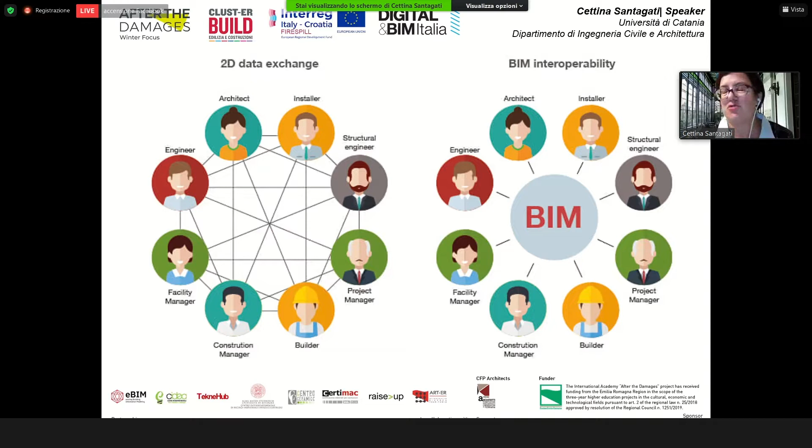This approach, this BIM approach, now let's try to look at it from a different point of view within a longer process which leads to the definition of digital twin, in which the BIM approach is one of these steps that we can call levels of maturity of the BIM. Also in this case, the concept of digital twin comes from the manufacturing industry. The digital twin word was created by Grieves in 2002.

Here I chose one of the best definitions, in my opinion, of a digital twin. So it's a dynamic virtual representation of a physical object or system across its life cycle using real-time data to enable understanding, learning, and reasoning.

There are recent studies trying to make this parallel, this connection between digital twin in the manufacturing system and the implementation in the building sector. Specifically, Simon Evans identified 6 levels of maturity. So it is from level 0 that we started developing with the first laser scanners, what we call reality capture.

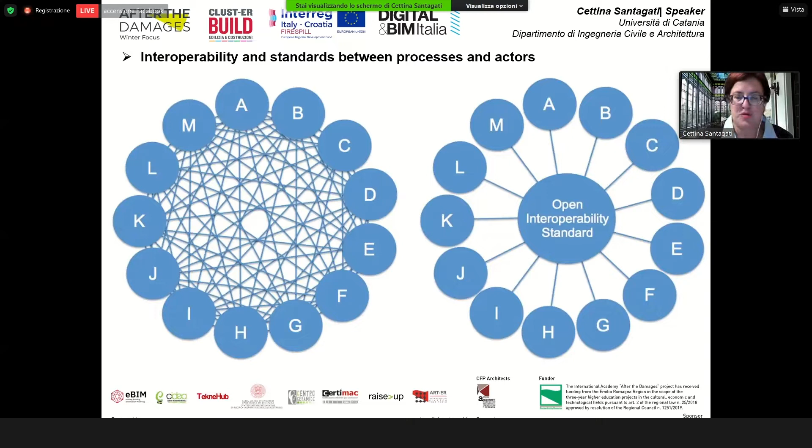For us, both in the field of project development and the context of intervention in existing systems, if I've done an acquisition through laser scanner or these techniques, and then moving to the model, and then moving to additional investigations, all these passages sometimes involve, because of technological barriers, the loss of data in the workflow, which we should limit in order to obtain products which, from the beginning to the end of the process, are controlled, are checked.

Another crucial aspect concerns semantics and ontologies. Some time ago, I could see that Federica Maietti was connected. These are a few pictures from research of the European project INCEPTION. When we acquired, and please remember level 0 reality capture, to giving intelligence to our models, a point cloud contains no information about semantics, so it's a number of different points in which we give a meaning, both during modeling and during reporting.

One of the objectives, one of the challenges of several research teams is to work on semantics, therefore on recognizing within a model the different parts, the hierarchies and the relationships, to be able to achieve the so-called layers of knowledge, which overlap the various systems like the BIM, to try and add this information.

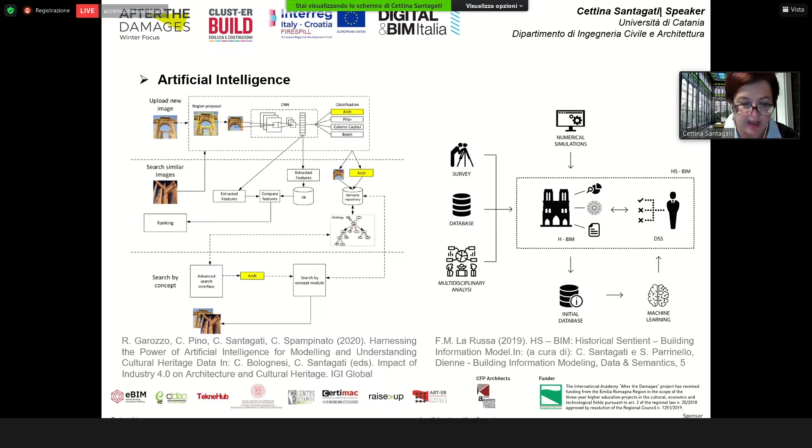So, for example, they are very useful in the case of classification or in the creation of decision-making support systems, which somehow suggest solutions, for example, for the management of buildings or rooms within buildings.

And going back to digital development, the models with no semantics, we want to try and facilitate our job, because all experts know that the passage from the point cloud to a model which is semantically functional is very time consuming, and in this passage we can lose so many things. And also, we need a long time to create new libraries of historical buildings, etc.

A research group is working on the automatic development of the passage between the point cloud and an automatic division in parts of the cloud, so that already in the cloud there are parts and pieces that can be recognized, like columns, capitals, windows, walls, doors, etc. There is a mixed team, researchers from the Politecnico of Turin, University of Ancona, and from the Bruno Kessler Foundation.

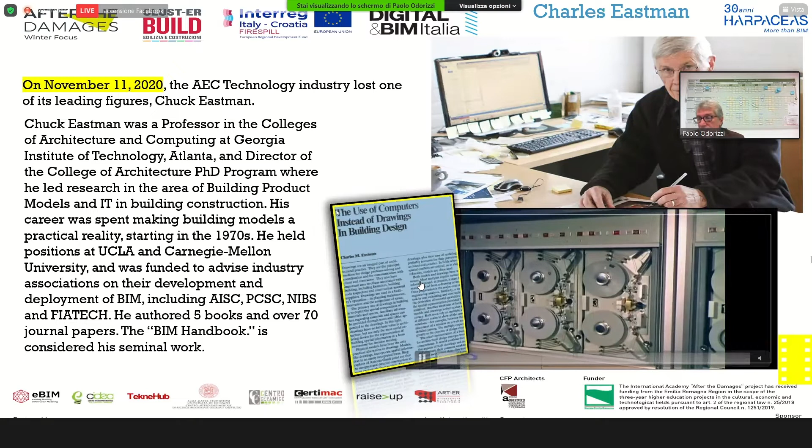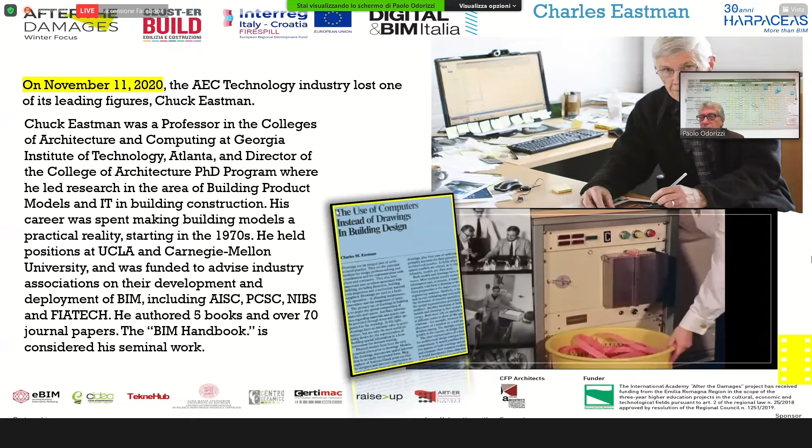These were written using old typing machines. Those were times where talking about digital transformation was not that feasible, but Professor Eastman was already explaining the transitioning into digital models. As you see in this article, the use of computers instead of drawings in building design was paving the way to today's technology. So thank you again, Professor Eastman from the Georgia Institute in Atlanta, for starting off this process that has cascaded down in Europe and all over the world.

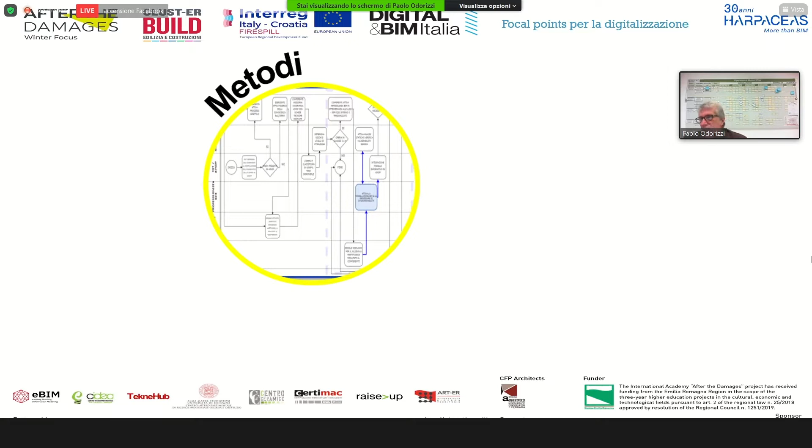In my presentation, I try to highlight the most meaningful things to me. First of all, we should consider methods, processes, and the policies to apply. So if we don't focus on procedures, we will never achieve good results out of technology.

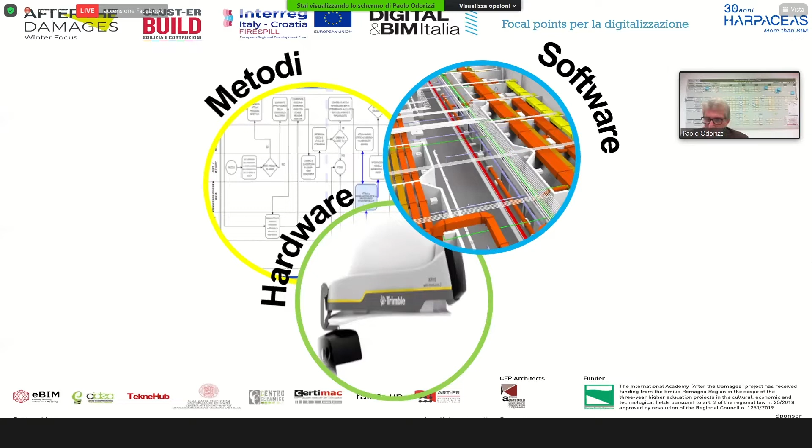In addition to this, we must use software technologies for sure, which is absolutely paramount. I would say obvious when we speak about digitization, but also we need to use software technologies that work side by side with hardware technologies. So we actually need to shift from software to the actual hands-on experience, the construction side, and we need to do this using instruments that are quite tangible.

Let's not forget the people. Yesterday we mentioned people a lot of times. We shouldn't take it for granted, but they're the main point here.

So let's talk about methods. Maybe methods was not the right term. I meant laws, decree laws, standards, guidelines, and technical reports. We'll take a whole seminar to talk about them, but let's try to have a look at this.

The Ministerial Decree 560, which provides for public administrations for developing digital awareness, or to raise their awareness to build capacity, to strengthen this capacity, and start doing things according to digital standards.

Then we have technical standards, so-called technical standards. Harpaceas is a member of the UNI in helping draft standards, for example 11337 on the use of BIM. But we also participate in technical tables of the 442 Committee of the CEN, where we develop similar standards at European level, and we also collaborate with international ISOs.

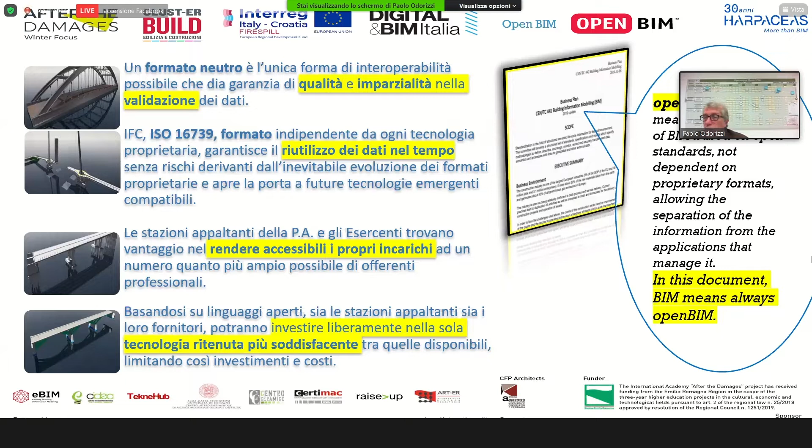Then there's the problem of investments. If the whole supply chain communicates using open formats, investments from the appointing parties and the appointed parties can be lower. There can be savings because they will be able to choose the most effective technologies for them and use those technologies rather than investing money in useless stuff.

And there's the data exchange issue, which I'm working on in a TC442 group. I would like to give you this short concept. This is the process as I see it: a series of operations conceived by a person, transformed into digital format, and then this information is transferred using so-called digital tools. I don't know if sending emails can be considered digital, but anyway, this information is reinterpreted, then checked, and then used.

So now we should shift from this process to one known as machine-to-machine. To simplify it, this means getting rid of certain steps, making it as automatic as possible. We should get rid of printing information and scanning it. We should use machines as much as possible, and by machine, I mean network.

Even in a bidirectional context, so with a query and an answer and a reply, this is not easy.

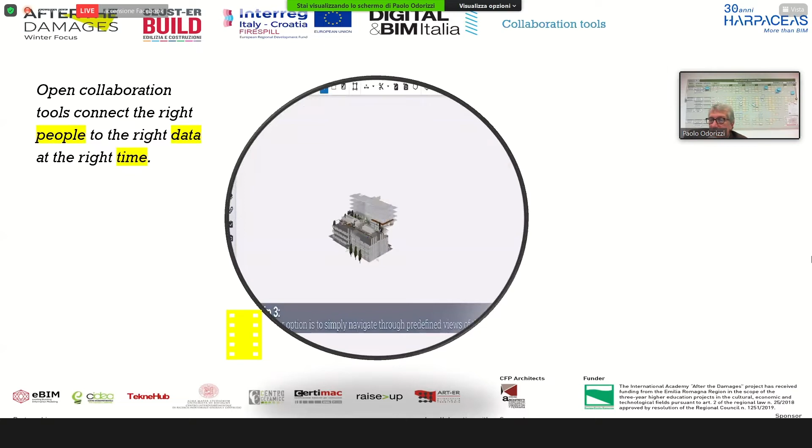Of course, there's information behind this. So we can connect people and data at the same time. So here you can see some examples of how these tools can be used.

In particular, this is an absolutely widespread tool internationally. From my point of view, I've seen a lot of extremely positive reactions by those who have tried to use these tools. I think you should try to believe it. This is the strongest suggestion I can give you.

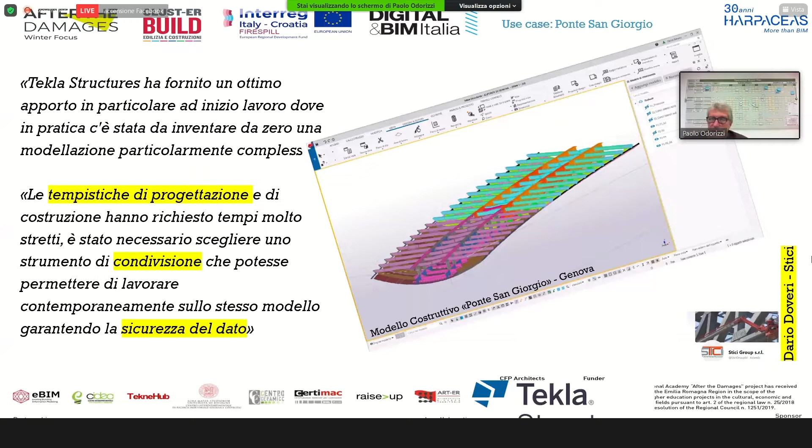This was shown by some use cases, some recent ones where we were directly involved, such as the construction model of the San Giorgio Bridge in Genova, where we were able to create an extremely detailed model of the project. This allowed us, according to some of the people who participated, to meet the design deadlines, through sharing information the way I have just described.

So we used digital technologies a lot, even the IFC format. And I would like to give you some more references, about people who were involved in this.

These people said that these tools were highly precise so that we could work on different steps in a parallel way, simultaneously. These results are real. We can't say that Italy is lagging behind anymore. This is proof that we have multiple references and examples of works made using these tools. So productivity and quality have increased thanks to these technologies.

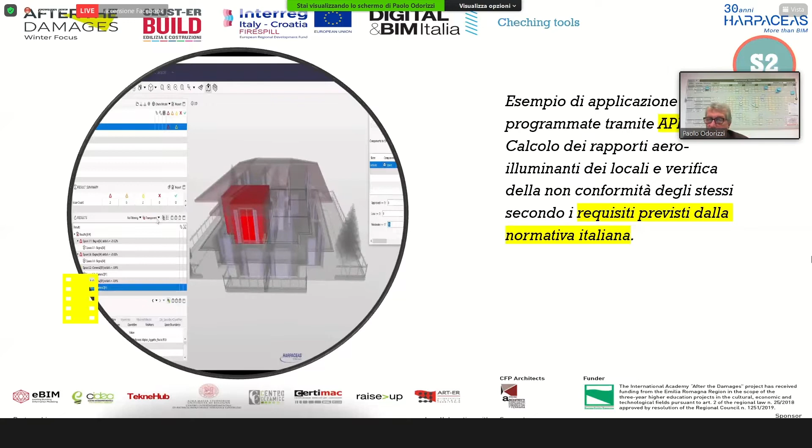Another example I would like to give you is programs and products that control design. They can be tools to check models, so model checking tools, something that is automatic, that checks the consistency, if they're correct, if they're good, if they contain the data that they should contain. Maybe they don't provide design information, we leave this to designers, but for sure, they give a huge contribution automatically to validating these models.

Now I'm using Solibri, which is a Finnish software, very well known, useful for this.

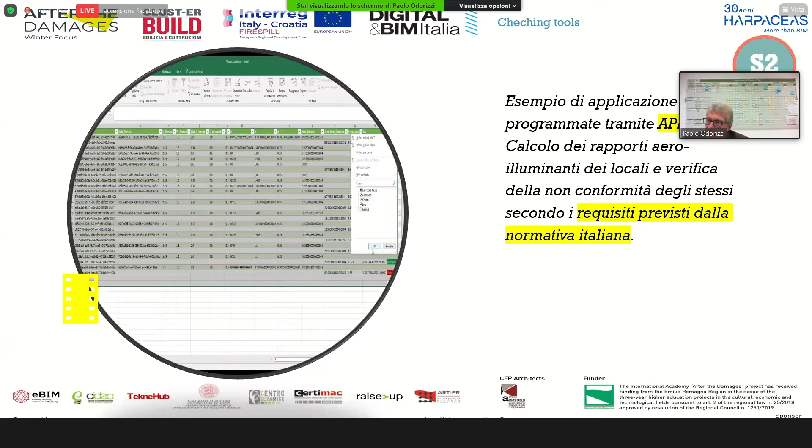The checks are not limited to models. We also check regulations and standards. We also have to think about solving the drawing problem.

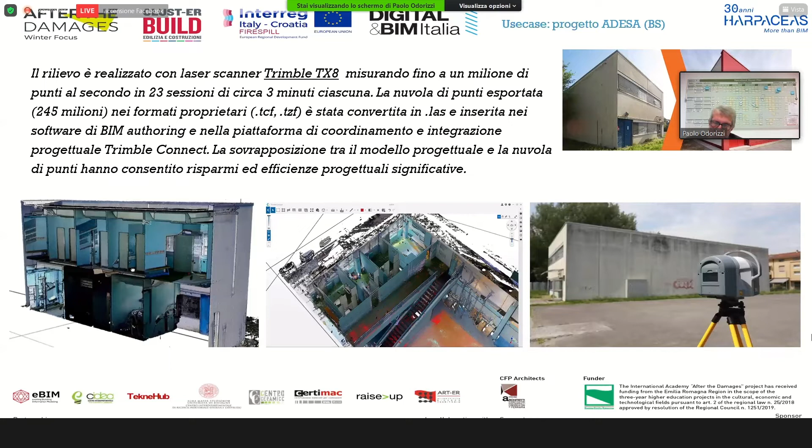We did a whole survey of quite an insignificant building. It was actually a gym. So we renovated, refurbished this building. So we used the point cloud and the integration in the whole design process.

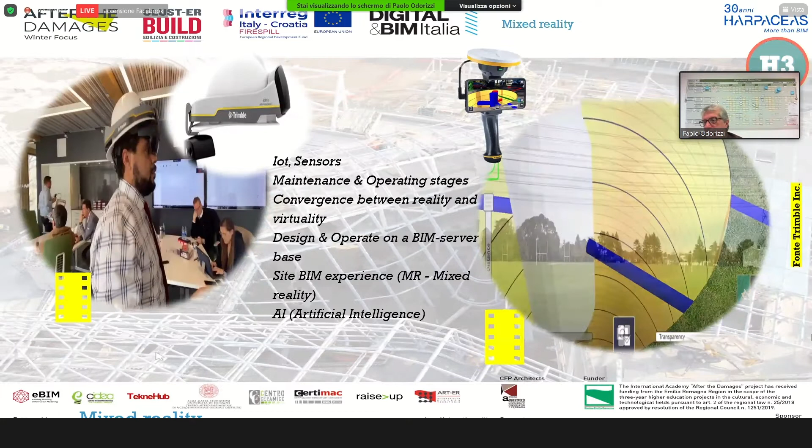We have these two wonderful machines. I'm not going to say a lot about them because maybe later in the day we will talk about them. These are new technologies. These are not that expensive. They're quite affordable. Here we can analyze the built heritage and mix the built heritage with the virtual things, virtual elements. So you can see an example of mixed reality. It can also be applied on the ground.

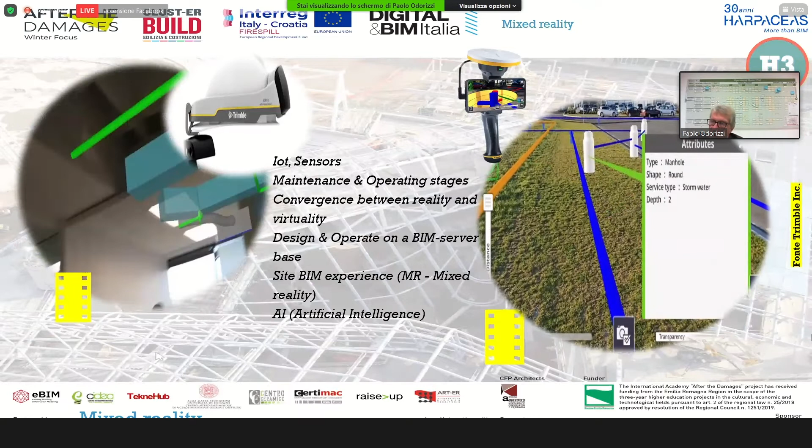So again, we're using a Trimble tool. So we can create models and see all the information available. These technologies are already available. There are some investors in Italy who have invested in this already. So for those who want to lead the trends in technology, these are extremely good perspectives.

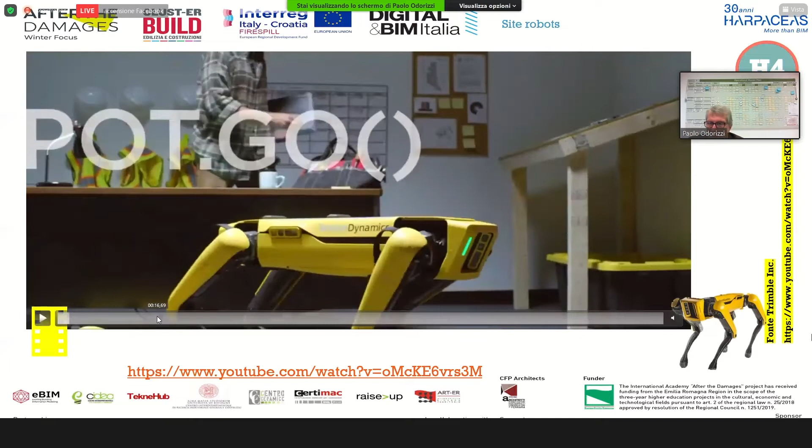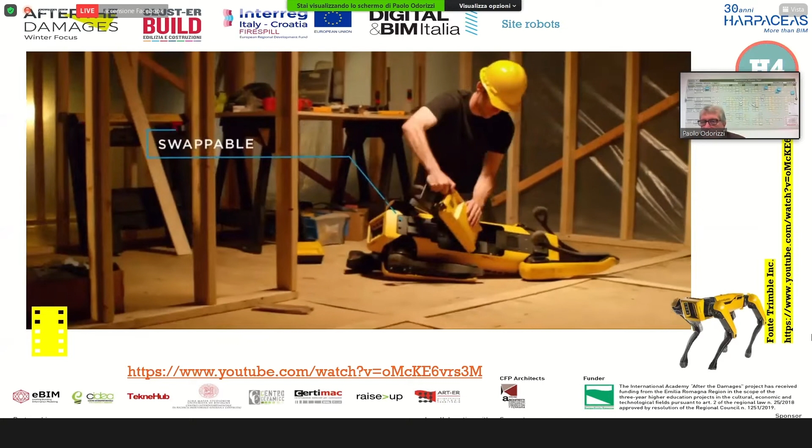I wouldn't say that we should do as this guy from Boston Dynamics, rather than a guy, I would say it's an animal. I'll leave you the website where you can look at this video. This is a promotional video. This is an ad. This tool is actually available. So that robot can transport surveying devices and work basically independently and on its own. It's quite expensive. It's powered by batteries. You should change battery after 1 hour of work. It can open doors.

So apart from this, maybe this cannot be achieved by everybody in a short time, but this gives us the idea of where we're going. It can carry 14 kilogram devices. We already talked about digital twins.

Just a couple of experiments. One we did on the entrance of the train station in Milan, which is the one on the left. So as you can see, the features of a digital twin model are quite different. They're technically different, but they allow us to give a digital identity, a digital look to the building assets that we have on our territory. For sure, we're gonna see a lot more of these, as well as digital twins used by Eni in this case.

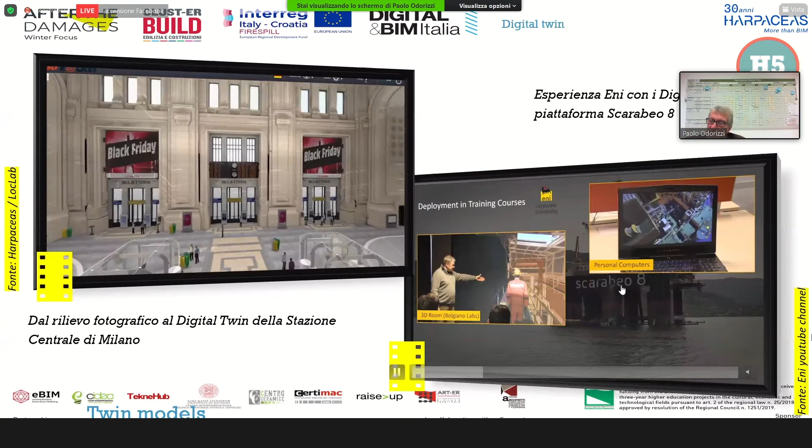This virtual model is used to instruct people who will be then sent to rigs, to oil rigs, to make them understand and see what they will find on the rig, which, as you imagine, are quite tough to work on. We did our own experiences on digital twins. We're still doing our experiences.

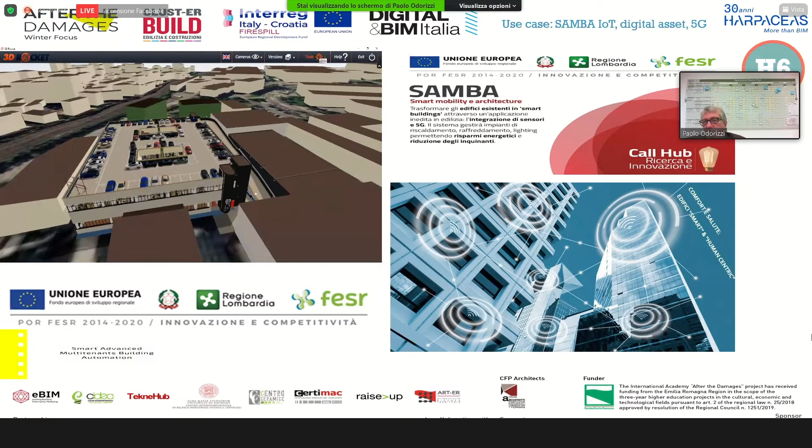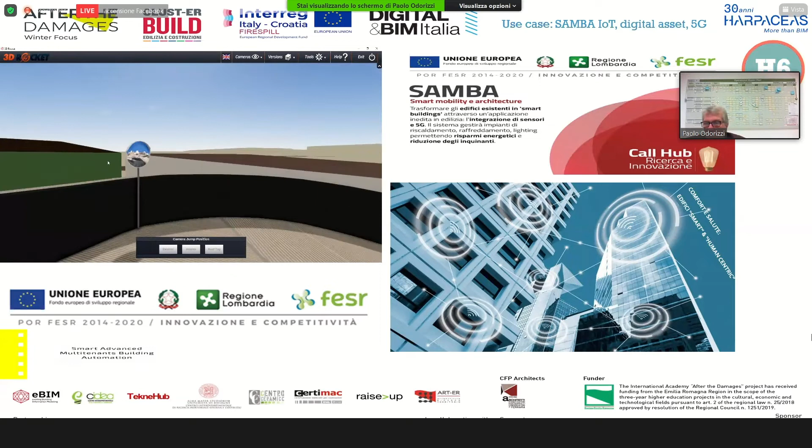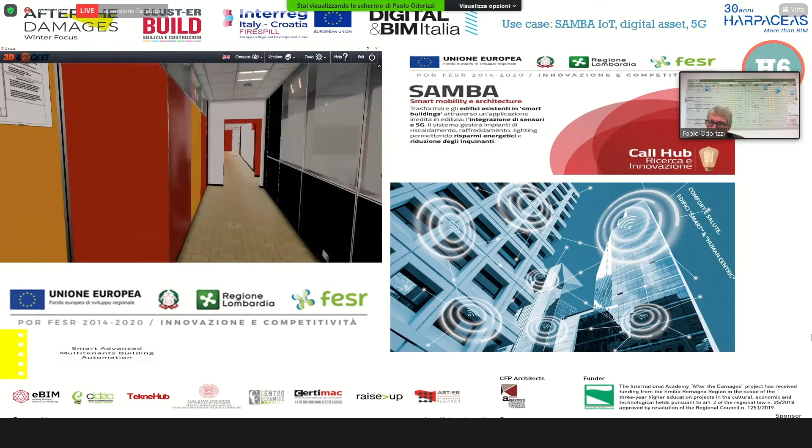Here you can see the Samba project, which is aimed at creating digital twin models associated with sensors in buildings. We're running some experiments. We're starting to build with our partners, such as Eucentre, that participated yesterday, to let the sensors, especially with the advent of 5G, achieve a more human form, I would say. Here, these are co-working rooms, I would say offices. So this is not a house, but these are rooms and spaces where having digital models is more and more important and requested, not only by the builders and the managers of the office, but also by the users.

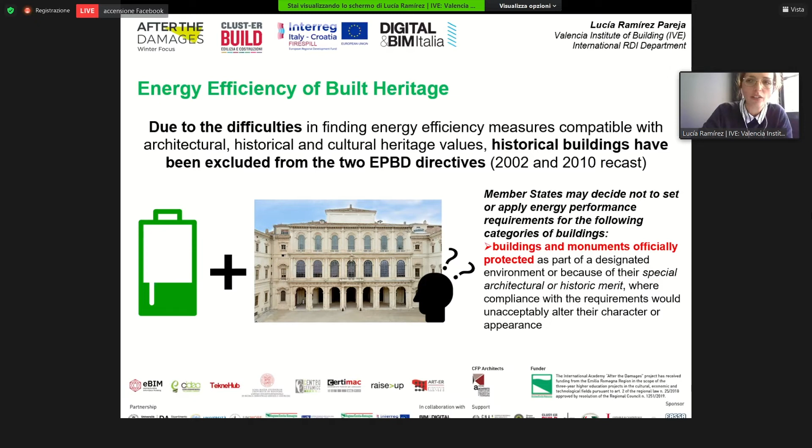So, environmental planning is progressively departing from a purely normative dimension of adaptation to one of improvement, by embracing energy efficiency as a key strategy, with the goal of the conservation of cultural assets. So, as already told before, the BIM methodology is mainly applied to new constructions. It also allows to create, as you have also seen, virtual reconstructions, these digital twins and so on. And this is ruled by physical laws and by other laws or structures called dimensions.

So during the pilot actions that I explained before, not only the 3D model of the historic buildings will be developed, but also the dimensions of time, costs, and sustainability will be integrated, like the 4D, 5D, and 6D dimensions. And moreover, the correct implementation of this 6D HBIM model should lay the foundation of the 7D HBIM model, which is crucial for an efficient management of the building in the future. So through this technology, it will be possible to increase the efficiency of the building process. And these upgraded models will constitute an important asset, not only for the documentation of the buildings, but also for the future possible management and for the realization of interventions. In fact, a UK study estimated cost savings of around 20% of the total project cost.

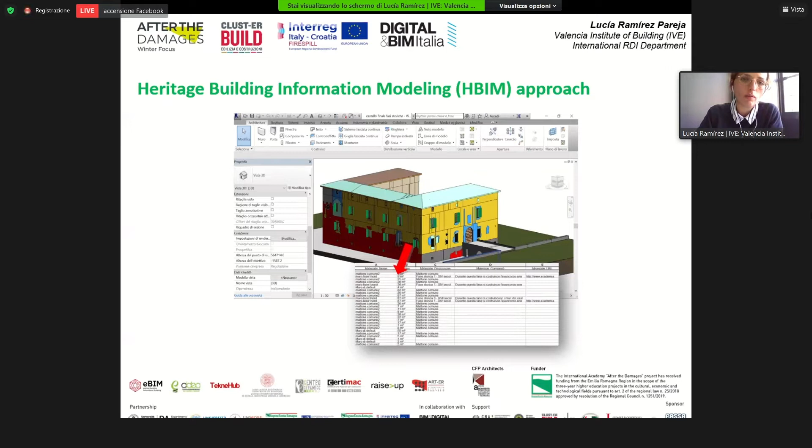So, in addition, as Professor Santagati and Odorizzi already told, the interoperability between the models and the energy simulation software and so on is also being studied in this project. And the goal is that the methodology that will be developed will provide the public administration with a tool for the energy retrofitting of heritage buildings, which could also be used, and this is quite interesting, not only for the analysis phase, but also could serve for the financial plan.

So, on the whole, we could say that the use of such a tool with this great potential could guarantee certain return of investment in the building sector. So this approach aims to improve the capacity of public institutions to develop sustainable energy policies and to attract funds by working on these cross-border case studies.

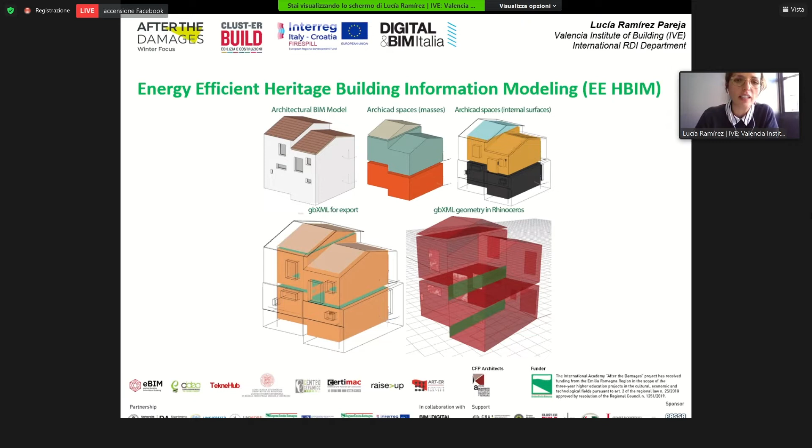So, by going further, private funds will ensure economic support through the instrument of energy performance contracting, which is based on the energy savings achieved from building energy efficiency renovations. So this EPC, or energy performance contracting, is a mechanism to secure energy efficiency renovation financing.

The EPC involves an ESCO, which is an energy service company, which provides various services such as financing and guaranteed energy savings. The ESCO profit depends on the achievement of the guaranteed savings. And the ESCO keeps involved in the measurement and in the verification process for the energy savings during a period which is called the repayment period. This model of ESCOs and energy performance contracting is mostly used in the public sector and to a lesser extent in the industrial and commercial building sectors.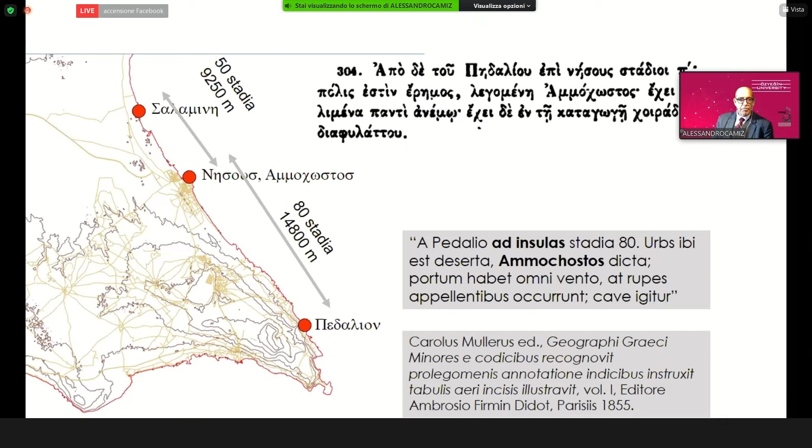First, Salamis is an ancient town. It was pictured and represented in the Tabula Peutingeriana in that position, and it appears on all ancient maps, as you can see. But ancient geographers described the location of this site in relationship to what is the current Famagusta city.

With the name of Ammochostos, and later Famagusta. The city of Salamis, according to legend, was founded by descendants from Trojans. So in the 8th century BC, it was destroyed and demolished several times by multiple earthquakes, and it existed until 342, when a powerful earthquake destroyed it completely and submerged it in sand, but it was rebuilt under the Constantia name. But we know that in the 11th century, the city was abandoned.

And in the meantime, the settlement of Ammochostos was being constructed, which is today Famagusta or Magusa. But let's take a closer look at this archaeological site.

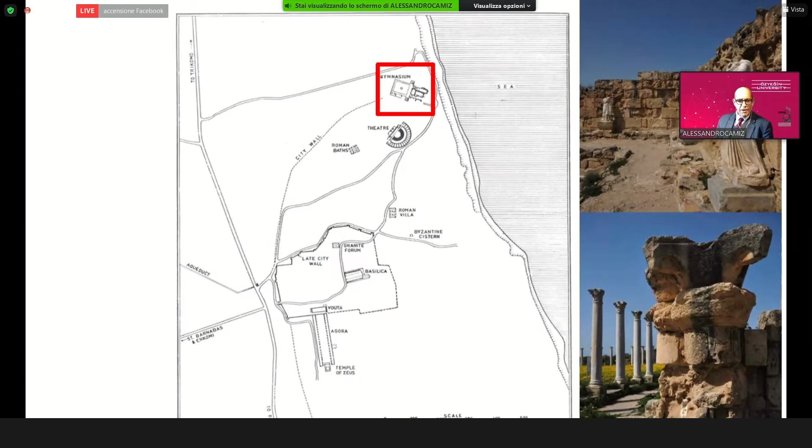We're dealing with the gymnasium in this presentation. Hopefully you can see these images. So this gymnasium was excavated since the late 1800s, and then also in the 50s and 60s of the 20th century, and then it was also partially rebuilt. Some columns and statues were put back in their original place.

We focused our attention on the baths of this complex. Our intention was to do the same for the gymnasium, but it wasn't possible yet. So let's have a closer look at these voussoirs.

There are two types of voussoirs. One is double-chaired in one sense, and the other is double-chaired in the other sense. We presume that this one, with a double chair only in one direction, and the other has a double chair in two directions. So the first voussoir we think was from the arch, and the second one belonged to the vault.

The first excavations were done in 1890, led by Munro. So the area of the gymnasium was discovered, and this was attributed to being, was considered to be, a Jupiter temple, a Zeus temple.

So these are some pictures that were published in 1891. These pictures are quite interesting because they give us some indications on the stratigraphy. The sand that was being removed from the site was documented in these pictures. But they didn't only describe it in words.

Another indication we have from this picture is the position of the fallen columns during what we think was an earthquake. By analyzing the pictures, you see the direction of collapse of the columns, which is the same, and we'll need this information later on to understand the behavior of the structure after the earthquake from 342.

So the excavations made in the 60s brought to light the whole baths, which were hidden under 3 meters of sand. But as I was saying earlier, we have no information about the position of the things and elements they found, nor the stratigraphy of the objects that were found.

So dating was more complicated, and this is a case where British experts worked better than the archaeologists who excavated in the 1960s. Now we have the Calidarium here, which is the central area, highlighted in red. That was the last area to be excavated.

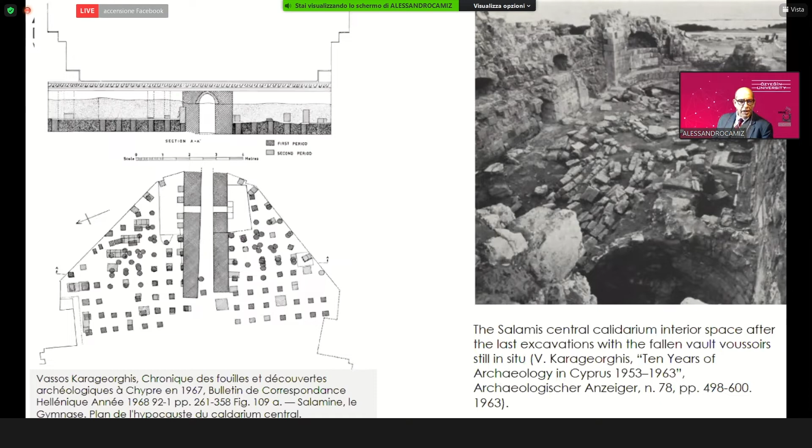And at the bottom of this excavation, we found this collapsed vault. You see the voussoirs in the picture. Also the top of the calidarium had collapsed. The top was rebuilt during the excavations.

Actually, the restoration and excavation works were not that disconnected. So Karageorghis had discovered fragments used as foundations of the columns, which he attributed to an even earlier stage, the Hellenistic age. So according to Karageorghis, this complex would have to be dated back to the Augustan age, when the first collapse happened. Then it went through multiple collapses and rebuilds. So we don't know how the last construction was carried out.

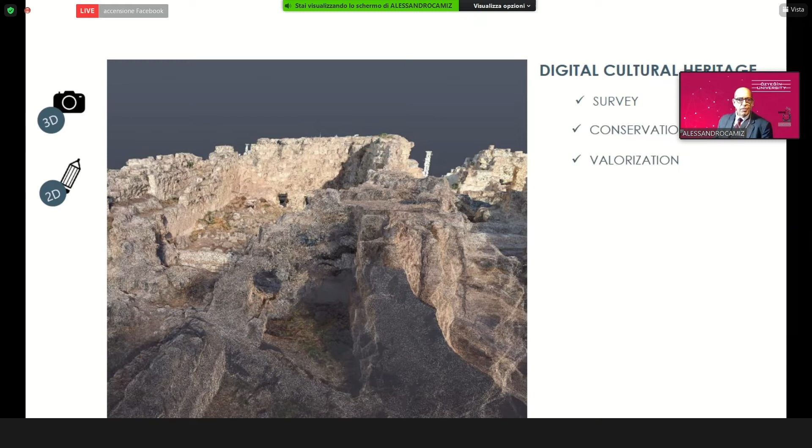So this is the first terrestrial photogrammetric survey. We used high-resolution digital cameras.

The climate conditions were quite harsh. We had 50 degrees in the shadow in August. So this is when we did the first survey.

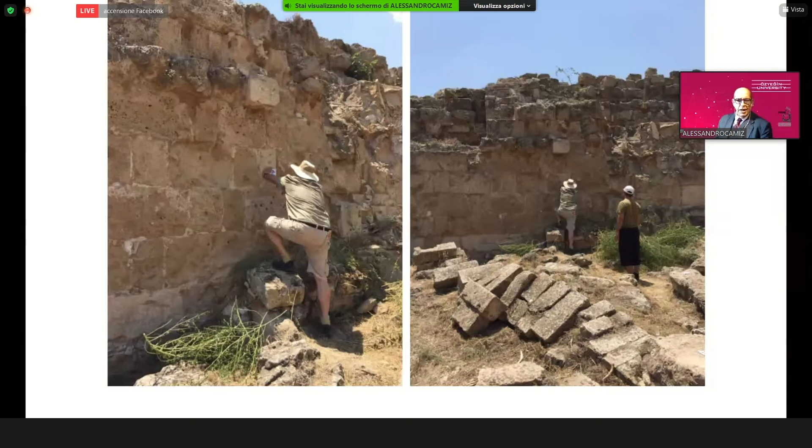We used self-produced targets to align images, using structure from motion software. As you can see here, the voussoirs of the first type aligned on the ground, looking like an arch, a collapsed arch. We were able to build the point cloud from these pictures. You can see it here.

In this first attempt, we tried to integrate GPS data as well, collected using a GPS node with the camera. We tried to use that to relocate the pictures, but the GPS resolution was not appropriate.

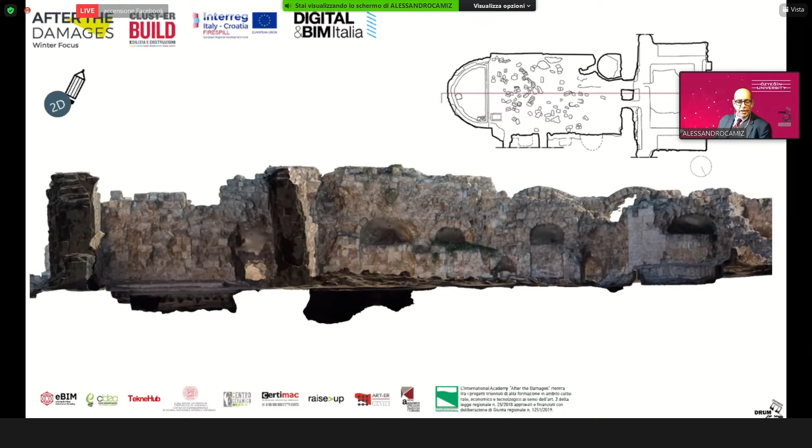From this first point cloud, we generated several elevations and sections that were actually drawn by hand. And here you can see a map section.

Why is this survey interesting? We wanted to give a date to the parts. We wanted to understand the use of this huge barrel vault made of these huge two-tiered voussoirs.

So we extracted the data from the model and tried to calibrate the quotas. In red you see the collapses, and in orange the original floors.

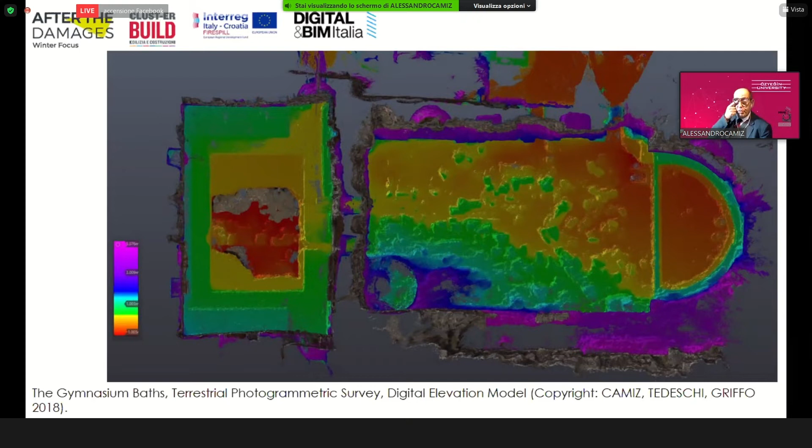The second survey was run shortly after, using a drone that was not a professional drone. We used the DJI Spark, but the advantage of this drone was that it could fly freely in Cyprus according to current regulations.

If the drone weighs 300 grams, you can fly without a license. You just need approval, in this case from the Ministry of Cultural Heritage, to fly over the complex. We applied for that permission and obtained it.

So I have a short video here to have a tour of the area that quickly describes also the operations that were made.

Can you hear the audio? Can you hear the sound?

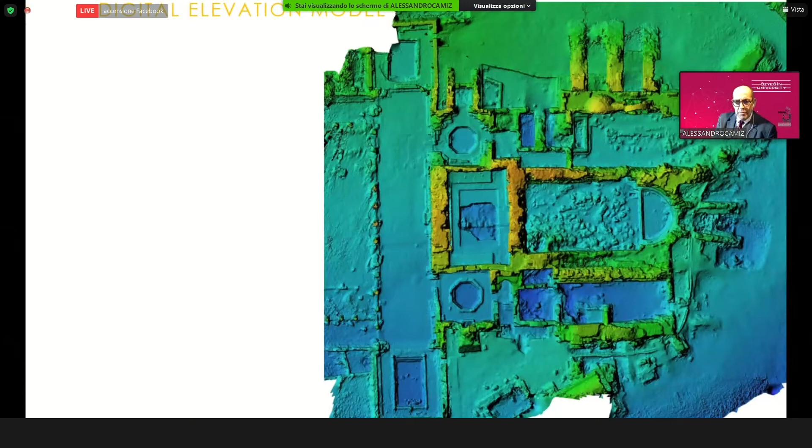And again, we generated a DEM, but not so accurate, neither in the gradation nor the stratigraphy.

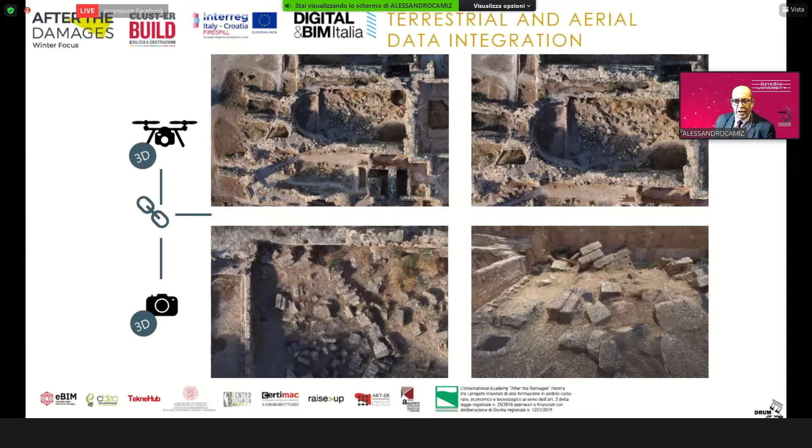Then we integrated the data coming from the aerial survey with the terrestrial survey. They had different dimensions because the drone was flying 30 meters in height, so the final resolution was not that accurate.

So we overlapped this data. We needed to have a closer look at the voussoirs one by one to measure their surface, evenness, and roughness.

We had to understand if these were trapezoids or not, because in order to be part of a barrel vault, they were either assembled using mortar, and apparently they were assembled and bonded with mortar because we didn't find any irregularities. We also used an electronic caliper.

So after the model, from the model we generated the maps.

Now let's get to the dating. The existing literature attributes this complex's reconstruction to the 4th century.

But these probably date back to the 4th, 5th, or 6th century. At this stage, the niches that you see in red were...

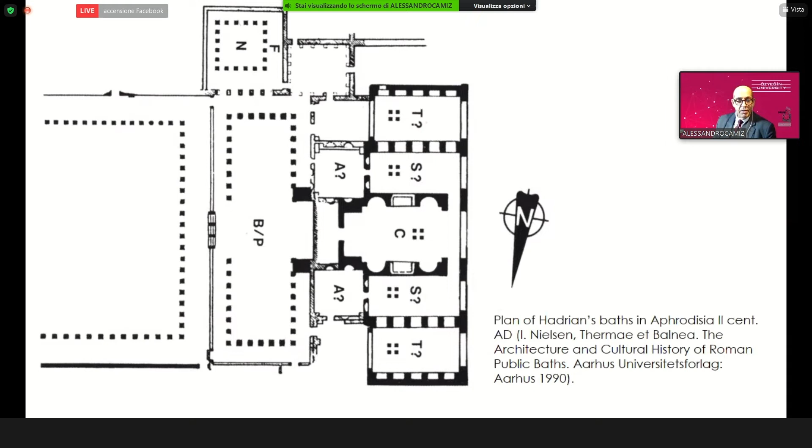The most similar building are the Aphrodisias baths from the Hadrianic age, which have a similar structure: the central symmetry centered on the calidarium, the lateral rooms, the two lateral pools, as well as the gymnasium. Actually, this kind of bath is a hybrid between the Roman model of classical baths and the Greek gymnasium model, with this open colonnade.

And this mentions some emperors. Somebody attributed this to Justinian and Theodora.

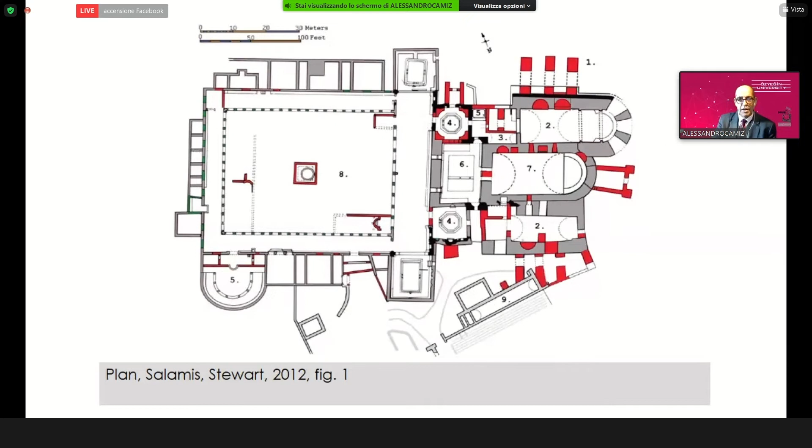Although it is not clear how coins ended up there, they may have ended up there at a later stage. In red, you see the latest stage to support the vault. Kissel carried out a very detailed study on capitals and colonnade, attributing the latest capitals to the Justinian age.

These capitals are from the pools, the swimming pools. These are the pools that, according to him, were rebuilt at that time, as well as the floor.

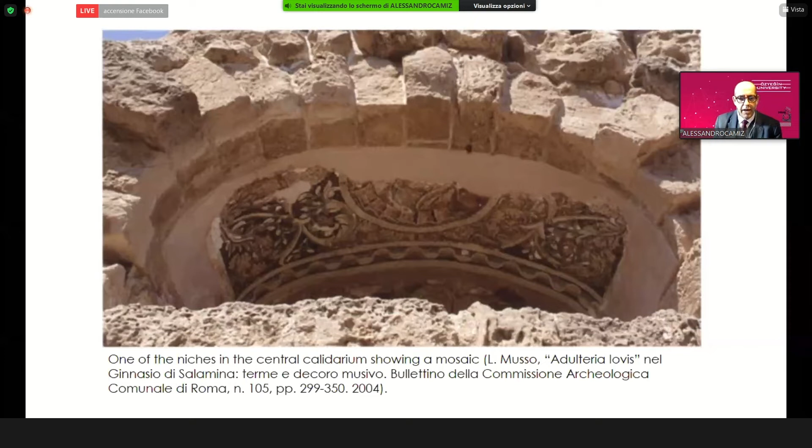Here, the niches that were infilled were reopened during the excavations, and we discovered some mosaics, as you can see, pictured by Musso, unanimously attributed and dated back to the 3rd century. It's clear that the vault was built after the mosaics, because the closure of the niches is previous to the building of the vault. Such a big vault couldn't have been supported by that structure, so those niches needed to be closed up.

There are two descriptions of the earthquakes apparently responsible for the destruction of this complex. The epicenters of those earthquakes, up until the 12th century, are from Lebanon and Syria. What's interesting is that each of these epicenters, if we connect it to the area of Salamis, gives us what's called the prevalent acceleration phase.

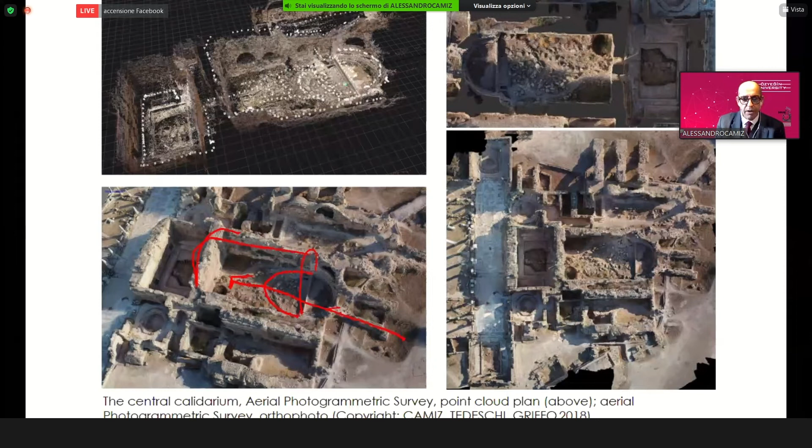I mentioned the fact that the columns of the gymnasium collapsed all in the same direction, as well as the vault itself. Let's see if I can show it again. So the vault collapsed in a clear direction, so much so that the arch, which probably was separating the vault from the apsid, collapsed in that direction. Of course, the prevailing acceleration during an earthquake is a statistical data, not a local data, but it can give us an idea of how the collapse occurred.

Probably this could have happened from the Lebanon and Syria coasts. Those are the epicenters documented in literature. Now let's try to see how this vault worked, how it behaved structurally. We did a comparison

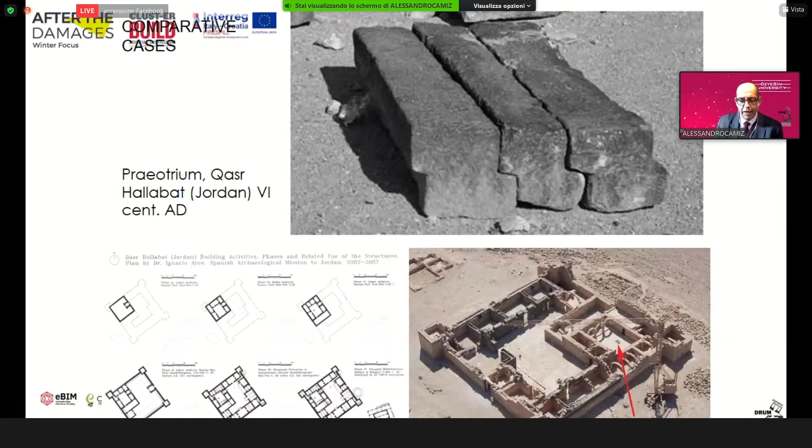But our voussoirs are two-chaired voussoirs, like those from the Praetorium of Qasr Hallabat. The voussoirs of the Praetorium are dated back to the 6th century, and we're not sure about the voussoirs we're dealing with.

This is the Praetorium Halabiye, again from the Justinian age. You see the chairing, but again, just in one direction. There are many examples of single chair voussoirs, and this is the detail that became a characteristic of Islamic construction.

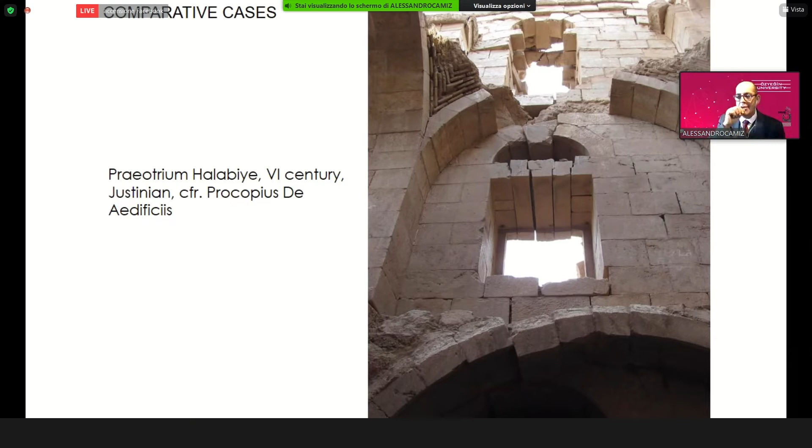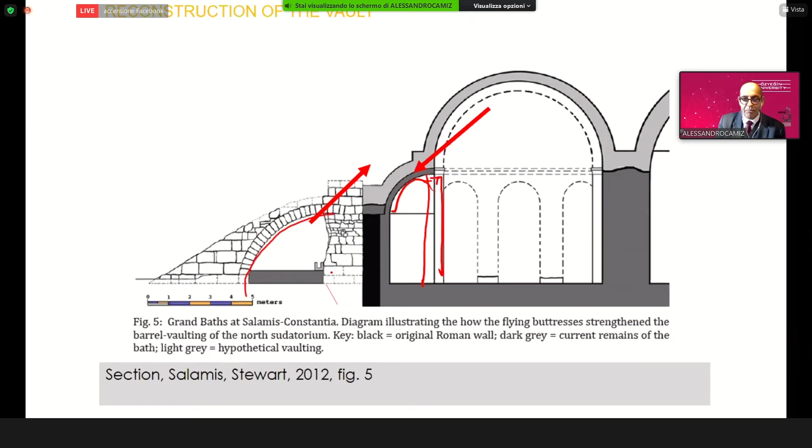So it shows that the vault was built after, and also the wall for sure was rebuilt after the tsunami. So again, this was rebuilt, and I have the impression, I'm under the impression that it is clear to the eye.

As we can see in this section, this is where the vault intersects, but the arch should be here at this level in order to support the structure. In the case of these arches, it's quite singular, as you can see, the voussoirs

we tried to see if the measures, the size of the voussoirs, could be compatible with the vault. So this is how we think it worked: they were joined in the direction of the arch, but also in the opposite direction, probably forming a fishbone structure.

We were not able to clearly measure. We used an electronic caliper. We didn't find any significant deviations from the right angle, although voussoirs are full of holes, so the data was not certain and exact, but we assumed that the voussoirs were bonded with mortar.

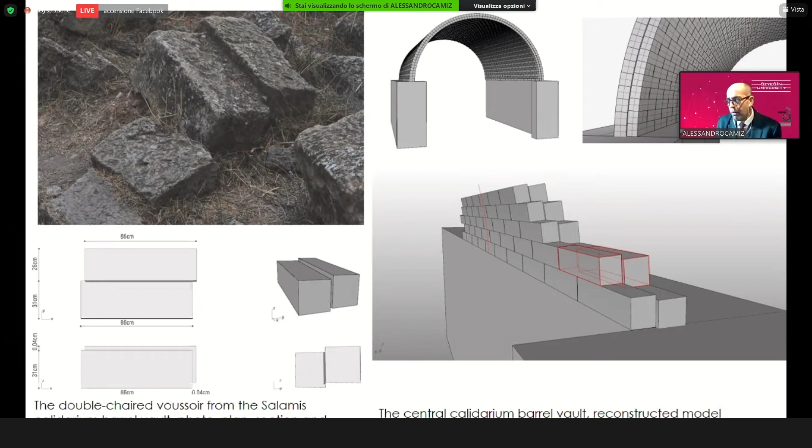We don't know if simultaneously to the earthquake there was a tsunami wave that filled this building with water up to the top. There were several more tsunamis until this area became a hill, and on top of that hill I think the Guardian building was constructed. There was this little house on top of this hill.

This work could be continuing in the future, provided there are enough resources. Dating buildings based on fragments found during excavations is quite dangerous, because fragments can be moved, especially by people—brought from one place to another to turn them into lime. But only locating fragments in a specific stratigraphic layer does not tell us about the date of the building.

This paper was probably published in English. Hopefully an Italian version will be published as well.

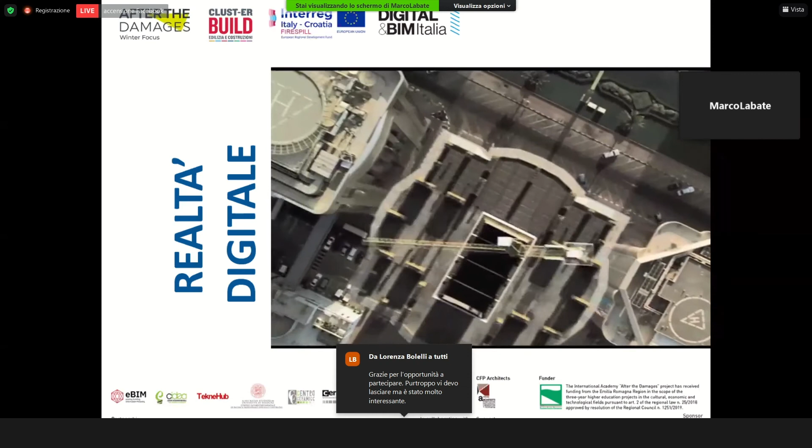You probably know it. It's a video showing quickly the evolution of a city, very recent city, which is Dubai. And this is the evolution of everything being the infrastructure of the city. We can see buildings, roads. Within the city we can identify special services, other services, roads, etc., which characterize Dubai. And if you look carefully, this is the amount of data that this means. So Dubai was born from nothing and developed in this extension. What is the amount of digital data required to store all the information we want?

We had some examples in archaeology. It's very interesting, where data acquisition is used to store and study all the information. In this specific case, like in the case of Dubai, this is even bigger from the point of view of information received. In fact, to date, information and contents is the new gold. So the value of specific information is like an exchange currency. This is what we exchange in the information we have.

Let me give an example. This data, not very recent, is from 2017: of the quantity of digital data produced in 2017, 90% of the data had been produced only in the last 2 years. So in 2 years, 2.5 billions of gigabytes of information had been produced. This is the memory of digital data in that period. And of course, this amount is increasing.

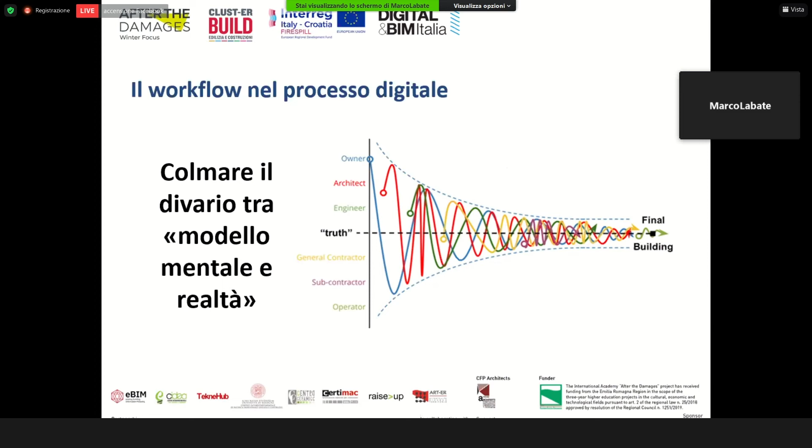We have those who manage the project. There are operators, there are surveyors, and all of them act at different levels together, and they also act at different times. So, managing this information in the same flow is not easy because operators act at different times. In the BIM, for example, it is important to have information available to all the stakeholders in the best possible way for all of them. Also, with a continuous, consistent updating and correspondence.

And all this for the creation of a digital twin. Continuous work to connect real with digital, so reproducing the world where we live. So we need to bring data from reality, acquire the data, manage the data, create a model, and through measurement solutions integrated with management solutions, software and modeling, bring it to digital. So we have this continuous exchange between the two worlds, between reality and digital.

We can do it through workflows, different workflows. Here we have one, which is the BIM, where from the field we can bring the data to the BIM management and then again to the field. I can explain it better subsequently and how to bring it to the field. And I invite you to look at this process where we start from the survey to the operational part in the field of

earthmoving machinery in software management, shared also in the cloud through several sharing platforms, like the one we see in this picture, Connect. Connect is a software, and we can share data in the cloud because data can be stored there, but also because those data can be available to different stakeholders at various levels. So we can update information, we can update systems, and then after the model, we can again see the digital model with the reality at the end of the process.

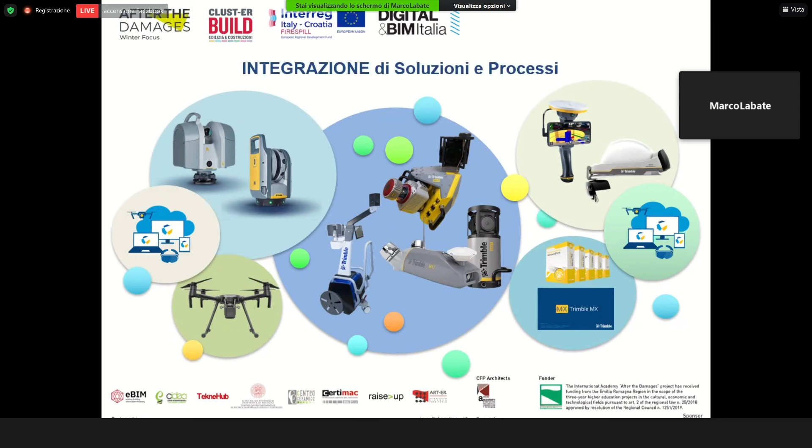In the choice of solutions to be used, here we have a scenario of tools. It is not my task to talk about tools and instruments. We know them. We have laser scanners, we have drones. In the middle, we have mobile solutions on trolley or machine, integrated with laser scanners, IMUs, etc., to collect the data. On the right, we can find the software solutions, and we can see in the picture some solutions that can review and integrate the digital and virtual parts with the reality. So it's a continuous flow of integration of data through integrated survey solutions.

This will be combined, as I said before, in the workflow for the BIM. This is integrated in a software. So the survey is done, as you can see on the left, and managed through software. Please consider that there are different software programs to do this at the same time. So the surveyor makes a survey, allows the operator in an office to manage data, and then receives an update and an answer. So in real time, there is field-office communication and office-field communication.

Simply, after this data are processed, it is possible to publish what is done, or not in the office. Customers, for example, want to see while something is done, for example, a building site. The solution is what I said before. In the cloud, we have not only the survey, also the BIM model. It is visible. It can be used. And the possibility also to process it in other physical or virtual machines with different operators. So it's a continuous cycle of information, even more for the BIM part.

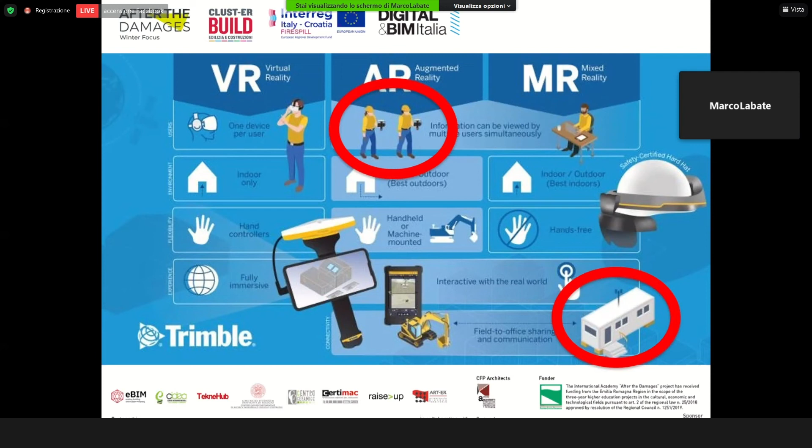Whereas the other two, augmented reality and mixed reality, allow working together in the field, working together directly with the office, with utilities, and also to interact and update while we are working, so it's a continuous updating of information.

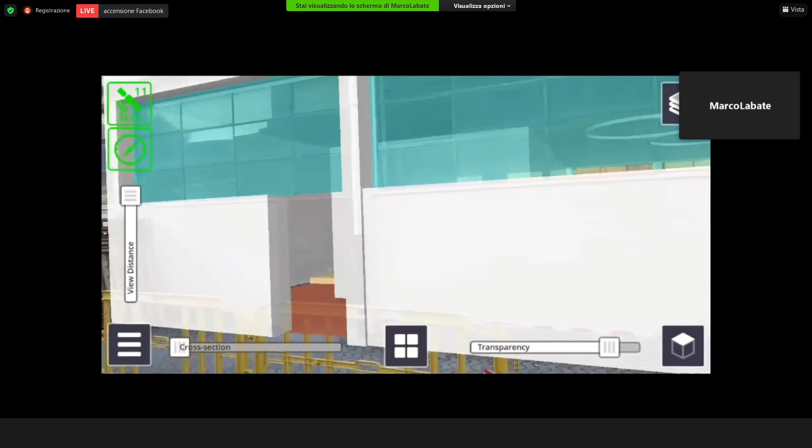Now, in conclusion, to make what I'm telling you more real, I will show you a couple of videos of two activities: one with augmented reality and the other with mixed reality. What you see now is a video made in our office. This is our new innovation center.

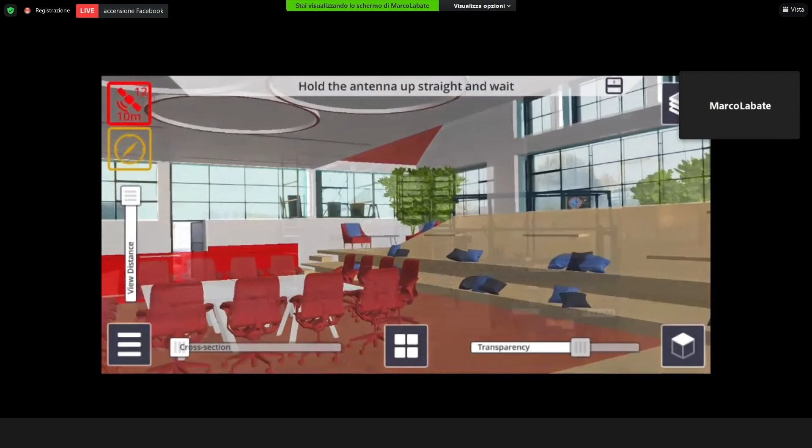It is a place where we receive our customers. This is now done. This is the augmented reality in the work site. Here we see a model of how our innovation center really is. So the operator is going into the work site, which is not like the model. On the left, the operator can create sections, and down below there is a transparency. Now the operator is going to work with transparency, and you can see the building site below.

At present, this is how it looks. So this is the final result. With sections, I can see the various elements. So there is a real check, real control, while workers are working. And from the central menu, it is possible to measure distances between objects, to calculate the layout, calculate surface areas and volumes. And now the operator is going to go inside and will go out and see the outside.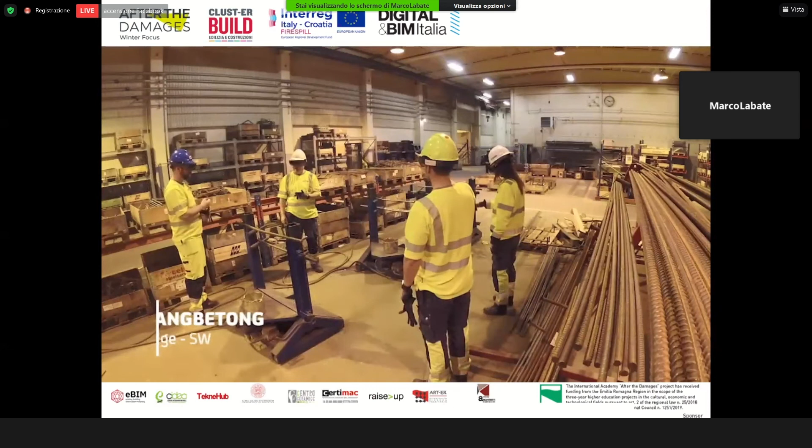Now we have another interesting work, which is not our normal work, but something interesting. It's a simulation, a company that assembles armatures. It was done by a non-expert operator. They all use HoloLens. As you can see, in the circular frame, they can see the model, how the armature should be built, and they just build it with no technical skills.

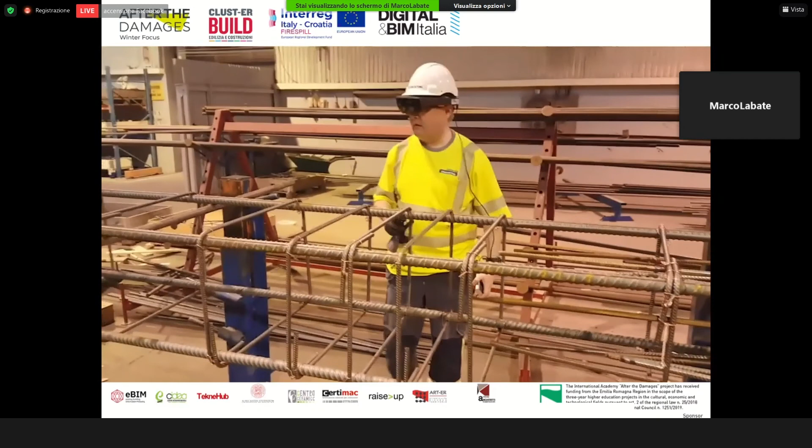They're of course supported by older, more expert operators. And here the operator can select and interact on what they're doing. They can also record and interact and work directly with the office. This is standard work. And this is the same operator with the viewer. As you can see, everything is real, but digital is perfectly overlapped. And the two interact because the viewer allows us to have two realities work together. So digital model with reality.

This was done also in many other sectors. So the advantage was that non-expert operators with the HoloLens were 30% more productive and faster than the traditional activity. So you can say that we can use these viewers. We can include the building manuals, handbooks for IKEA, for example. But think of the opposite.

In archaeology, we can find an archaeological site which is not, of course, complete. And then in the office we can remodel a simulation of how it was. There are virtual museums, and the operator who goes on the archaeological site with HoloLens can see the temple completely rebuilt with all its components, and then interact with the data, the information, so this information can be improved. This is a very important value at the end of a workflow of digital data. So in this case, for archaeology.